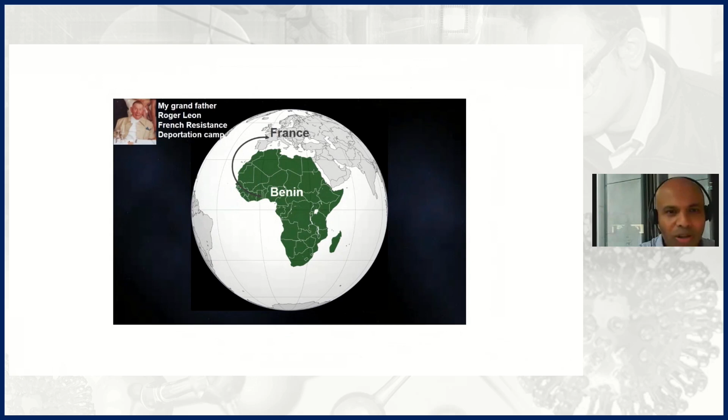What I would like to start with first is really talk about a bit of my background, because I always consider that history is important. This makes who we are today. So here we go. I'm born between different cultures. I'm born in Africa, between France and a small country called Benin. My grandfather was a French resistant. He went to deportation camps and survived those camps.

My other side of the family comes from a country that was at the time called Dahomey, which was a French colony. And if you remember, not that long ago, organizing colonial exhibitions and human zoos was pretty common. And so when we think about things that are normal today, they were not that normal a long time ago. And so this means that as a society, we can evolve and we can do great things.

Benin was very famous also because this was a port along the slavery coast. And so we know the history behind this. If you go back to the history of Africa, actually Dahomey was one of the most influential kingdoms in Africa. It was very well known in Europe in particular, with the Portuguese coming early in the 17th century, for its Amazons. The king used to have a special army only made of women that were known as the Amazons for the Europeans, or Mino for the Dahomean people.

And so if you go back to Dahomey, you can visit what is remaining of the palace of Abomey, which was burned upon the loss of the last king of Dahomey against the French. The reason I mention that is because the last king of Dahomey was called Kondo.

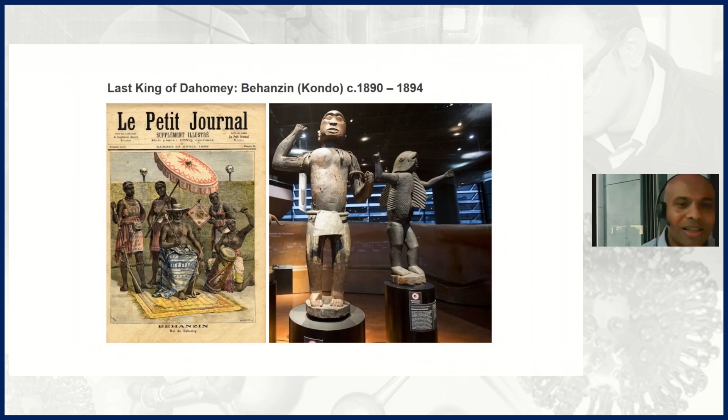My name sometimes is seen as complicated, and typically there are reasons for that. I'm born as a Zinsou, and so the tradition in Dahomey is that the first kids that are born as twins cannot carry the same name. So I've got two grandfathers, one who was first born with the name of Zinsou, and the second one couldn't carry the same name, so he was called Aguey. Aguey means twin. And so to recognize the background of our family, my mother decided that I had to carry a French name, Francois, and Kondo, which comes from the last king of Benin.

My grandfather was the first president of independent Dahomey for a year before a coup d'etat, and my father was among the African elite that were sent back to France to be educated. So my father actually studied political science. When he came back to his country, he wanted to develop a bank of investment for Africa and do things like microcredit to help his country develop. But some of his classmates, when they came back to their country, organized some coup d'etat. So when the French government saw that my father had an ambition to develop a bank of investment, he was put in jail. And so this was the end of this adventure.

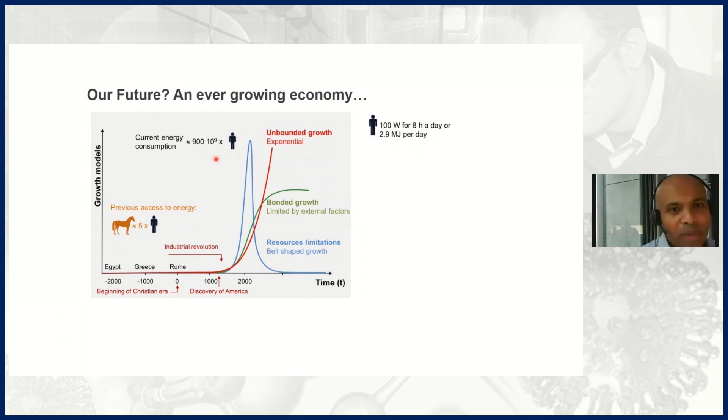Before the Industrial Revolution, what we had access to is mainly slaves, typically with an output of 100 watts, and animal power, and then renewable energy in the form of wood, for example. Then through the Industrial Revolution, we discovered how to use fossil fuel in the form of coal, then oil, that is more energy dense, and typically this has enabled us to significantly grow the Earth's population and grow the capability of our humanity.

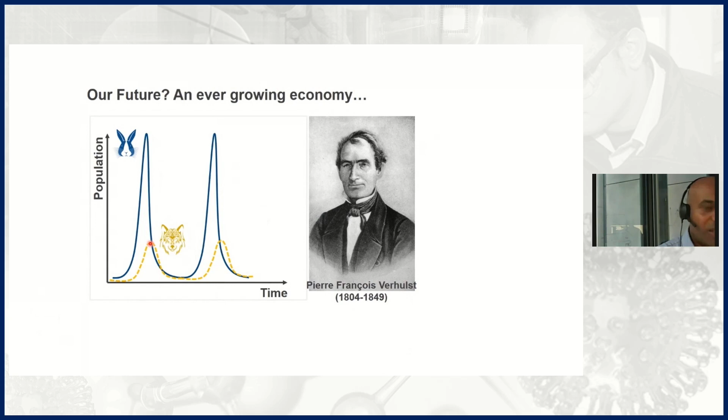Those bell-shaped behaviors have been known for a little while now, since the 19th century. In particular, these models were developed by a Belgian mathematician, Pierre-Francois Verhulst, and typically he was looking at animal populations. If you take some rabbits and wolves, typically the rabbit population will increase as long as they have access to food, and then the wolf population will follow the same trend, and then it will reach an optimum where all the rabbits are going to be eaten, and so the population is going to decrease.

We know the same thing is happening for all resources, and this was shown by King Hubbert, who managed, with a very similar model, to predict the oil peak in the US. So for me, the best we can achieve, unless we find unlimited resources somewhere in the galaxy or the universe, is potentially a bounded growth. And so then the question is, how do we live in a world where we have a bounded growth?

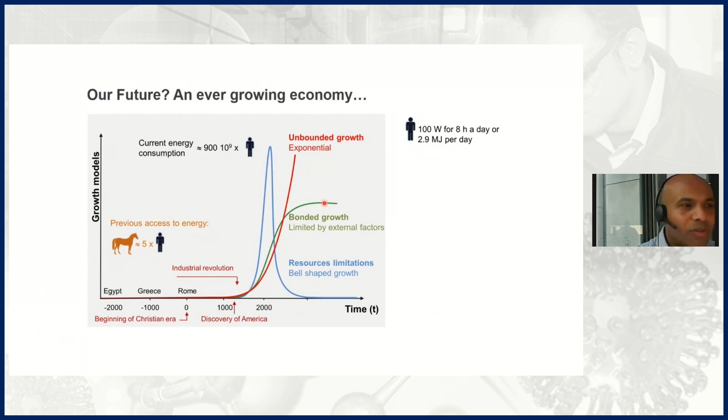Another way to look at this is to consider the Earth's entire population, and divide the amount of electricity consumption across our planet by the number of people we have. You can classify that in a chart like this. What you see is that the average across the world is about 1. So we have enough people on the planet to produce the energy we consume globally. If all of us were slaves, we would produce enough energy to sustain our current consumption. What you see is that this relies on many countries with minimum access to energy, and a few countries with extensive access to energy.

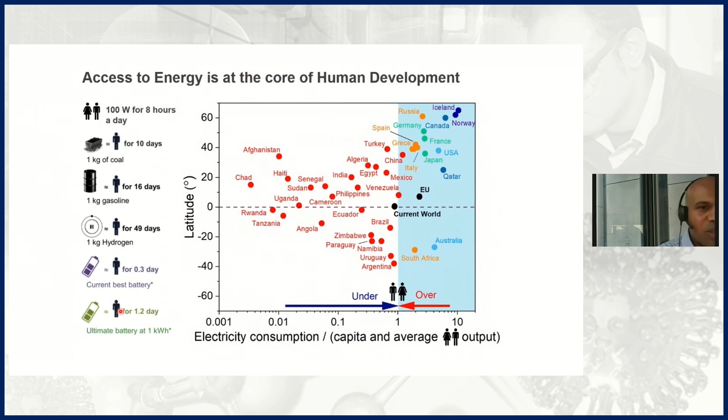I will comment on batteries later, but the energy density of batteries is rather low in comparison. For me, the key message I want to share today is that I believe hydrogen, if we can do it well, has the power to reshape our society and provide equal opportunity. This is why I've always been extremely interested in developing the science behind hydrogen, because we can probably do very good things with that beyond the simple act of making money and creating jobs.

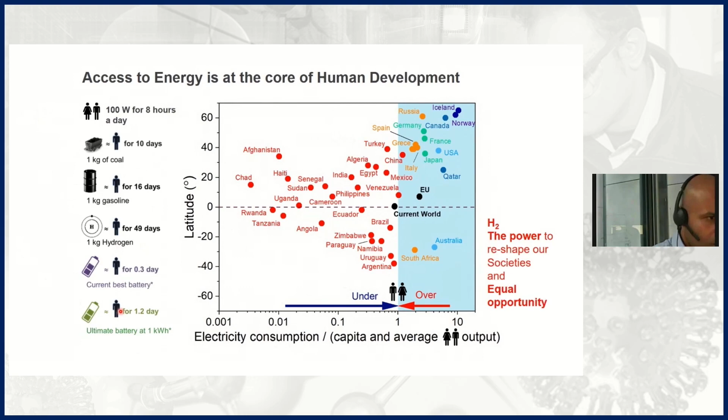Okay, so our solution is most likely back to the future with renewable energy. We know we have plenty of renewable energy around us. If you take, for example, the solar radiation per second, that's equivalent to a huge human output. We can run that through solar panels, and the technology exists, although we still need to improve it to increase efficiency, because the efficiency of solar panels is relatively low. We also need to develop technology where those solar panels will be easier to recycle, so we can fully close the loop and create a real circular economy.

Use it locally through a combustion engine, because you have to remember that in our society, to produce goods or have access to various things, we need not only to generate electricity, but also to generate heat, particularly for our homes but also for many industrial applications. This is something great with hydrogen: you can actually do both. This can help us sustain and improve our living standard.

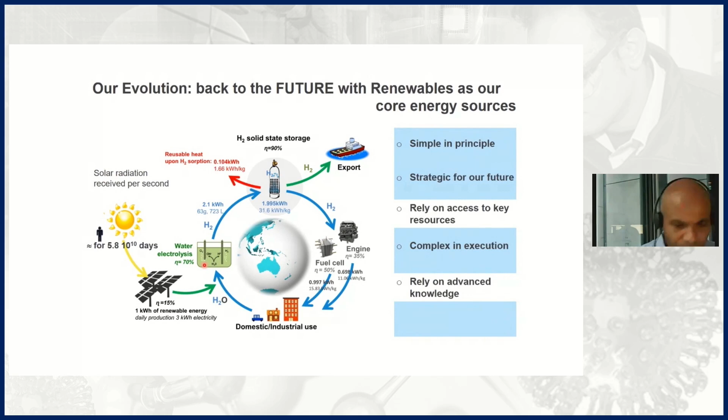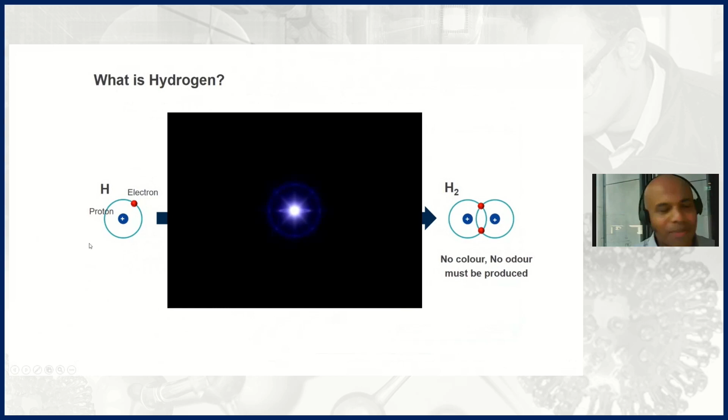Okay, so what is hydrogen? Maybe I thought I'd come back to the basics. Hydrogen, let me find my pointer. Hydrogen is a very simple element: one proton charged positively, one electron. Here you have a very simplified model of what the hydrogen atom looks like, with the proton in the middle and the electron spinning around.

In reality, it's a bit more complex. The electron doesn't spin around a specific orbital. You will find it in different positions depending on time. When you take those two hydrogen atoms together, you will form a hydrogen molecule. This hydrogen molecule has no color, no odor. It exists in the atmosphere at very low concentration, parts per billion.

There is some excitement these days about natural caverns that will contain some hydrogen, but this is yet to be determined. So really, if we want to have access to this hydrogen, we must produce it.

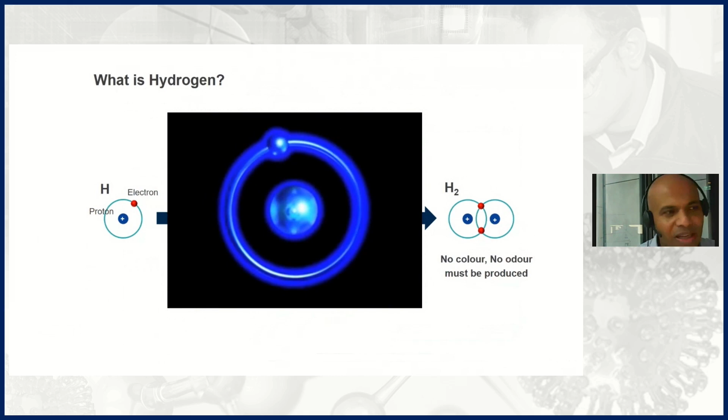To come back to hydrogen and history, hydrogen was first discovered in the 16th century, and there are some old manuscripts showing Paracelsus simply putting acid on some metal chips, typically iron, and observing the evolution of a gas. He was not able to tell what that gas was. Robert Boyle made the same observation, and Henry Cavendish finally isolated the gas and called it the inflammable air.

If you look in the literature, the name hydrogen comes from Antoine Lavoisier. Very quickly after hydrogen was discovered, it was already used by engineers, and the first one to use that was Jacques Charles, a Frenchman. He used it to fly some of the very first balloons. This one is called a charlière, not a montgolfière, because the montgolfière relies on hot air.

These rely on hydrogen. So the hydrogen was produced with what I would call today a dirty process. Typically, you take some iron chips and pour some acid on it, and this will evolve hydrogen, and then you inflate your balloon.

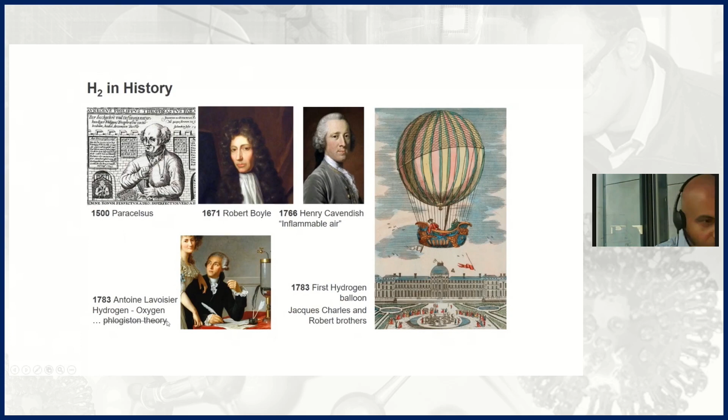As you know, there's rivalry between the French and the English. So maybe the English discovered the molecule, but the French brought some elegance to it. In particular, Lavoisier refined all the chemistry nomenclature in naming what we know today as hydrogen and oxygen. Very quickly, as I mentioned, hydrogen has been used in various applications.

What we see today is the evolution of a lot of work done in the background. The first person to use hydrogen for mobility was Antoine de Rivaz. He was also French, a general working in the army. He quickly realized that hydrogen was something very good—it explodes, and it does that in a clean way. So he designed the first spark ignition engine.

On his small device, what we'll call today an automobile, he had a rubber balloon in which he put some hydrogen, inflated the balloon, and this was sufficient to get this charrette to move for a few meters as you light the reaction. In 1863, Lenoir, who was working on developing a Hippomobile, actually produced hydrogen through electrolysis and had some storage vessel on board, and ran this Hippomobile in Paris, between the middle of Paris and Joinville-le-Pont, at a speed of 3 kilometers an hour.

Later on, you had the inflated balloon, like the Zeppelin, that started to take people across the Atlantic. The incident of the Hindenburg, as you know, is very famous and gave hydrogen its reputation as one of the most dangerous things we can deal with. Jules Verne, in 1874, already could see the limit of coal and was already calling for a water economy or a hydrogen economy.

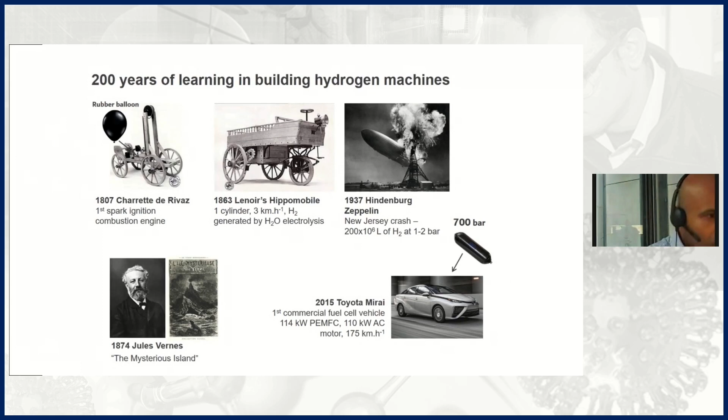Okay, so this calls a critical question: what are the different states of hydrogen, and can we have access to hydrogen in different forms? Here is a phase diagram, showing the different forms of hydrogen under different conditions of temperature and pressure. At room temperature and atmospheric pressure, hydrogen is a gas.

So typically we are here, and hydrogen is a gas. If you start cooling down the hydrogen to minus 250 degrees C, you will have hydrogen in a liquid form.

And if you want to solidify hydrogen, you will have to go to extremely low temperature and extremely low pressure. And if you want to have hydrogen in a metallic form, again, you will have to go to extremely high pressure. This has been demonstrated only a few years ago.

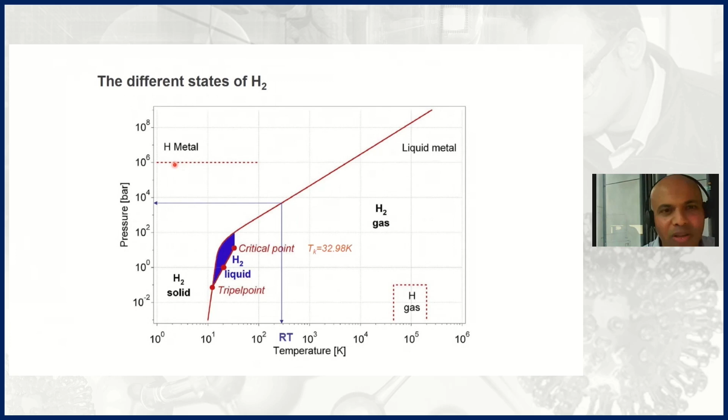You can compress hydrogen to densify it, so you can use it, for example, in vehicle applications. You may have seen that the norm today is 700 bar. There is a reason for that.

It's because as soon as you start compressing the hydrogen more, you need materials and vessel wall thickness that are heavier, and this means you are going through a curve like this. So at some point, the vessel is too heavy, the volumetric density of the vessel is too low. The optimum with the best material we know today is around 700 bar, so compressing hydrogen at a much higher pressure doesn't bring any benefit.

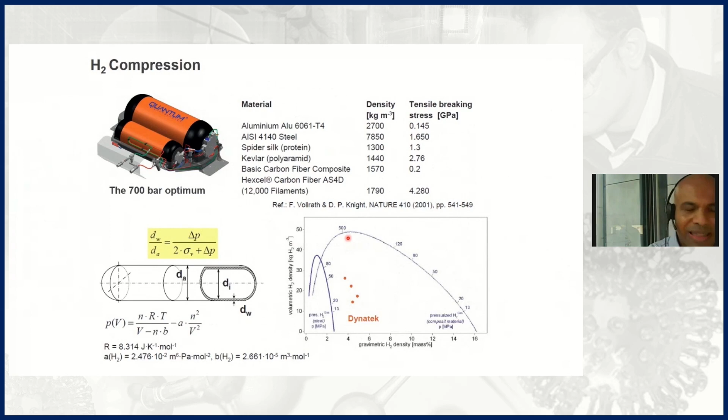You can also liquefy hydrogen. Typically what you will do is start from very pure hydrogen, otherwise you are going to liquefy impurities like oxygen and nitrogen too. Then you run that through a range of heat exchangers, cooling down the hydrogen, for example, with liquid nitrogen first, then run that through a catalytic exchanger to further liquefy the hydrogen.

The reason you need to run the hydrogen through a catalytic system: a catalytic system is typically a metal that enables you to convert two forms of hydrogen into one. Without going too much into scientific detail, hydrogen at atmospheric pressure and room temperature exists in two forms, what we call ortho and para. These correspond to the spin - typically the nucleus or proton has a spin, which comes from its magnetic moment of rotating. As you liquefy hydrogen, you are going to convert all the ortho into para.

This is an exothermic reaction, meaning it's releasing a lot of energy. To facilitate that process, you use something called a catalyst. So what you see typically is that the liquefaction process is very energy intensive, and typically a third of the energy in the hydrogen you put in is used just to liquefy hydrogen.

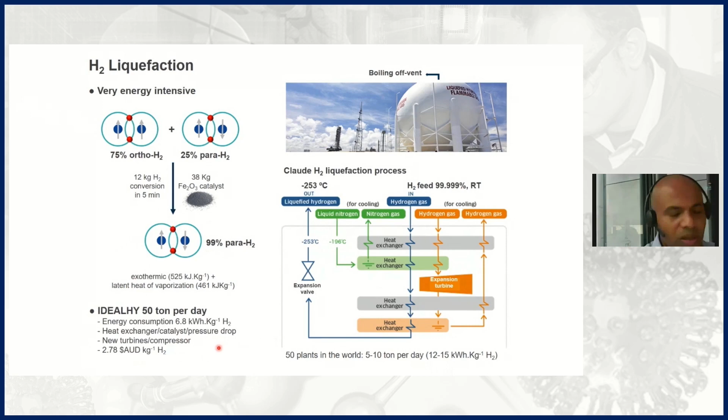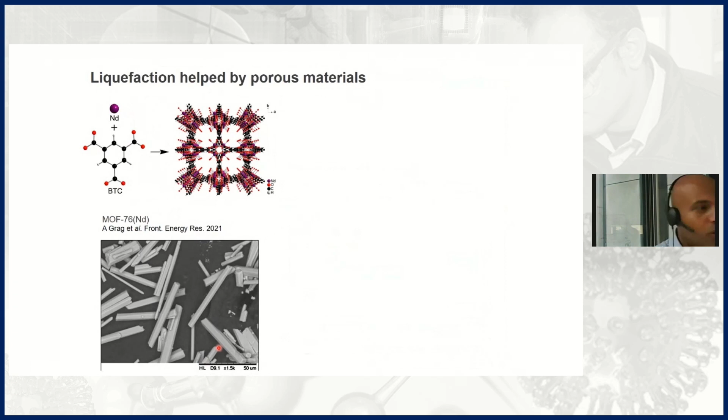One thing you can do to improve the liquefaction is to use porous material, for example metal organic frameworks, or MOFs. There is a lot of expertise in the country in making those MOFs. What you rely on is material with extremely high surface area, and roughly there is a rule called the Chahine rule that you can store 1% of hydrogen per 500 square meters per gram of material surface area.

What this enables you to do is to liquefy hydrogen at a temperature of minus 150 degrees C instead of minus 250 degrees C. But the downside is now you have to use this material, and you have to find effective ways of producing those materials at cost.

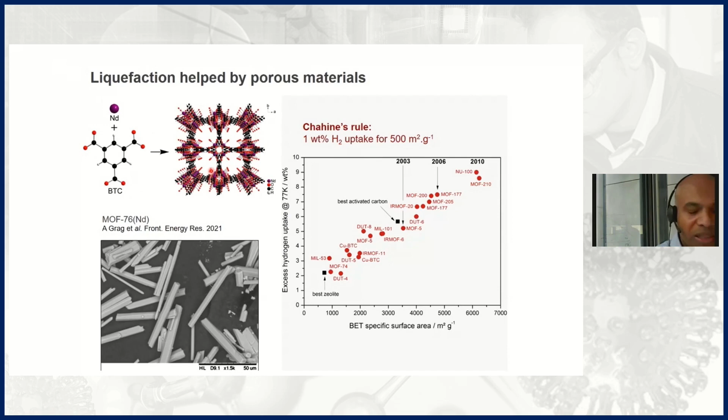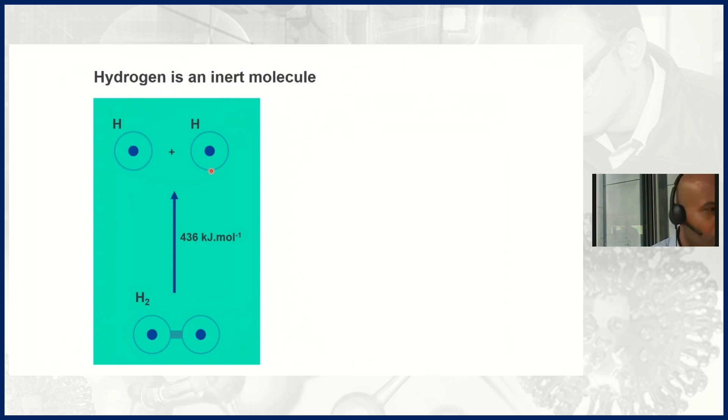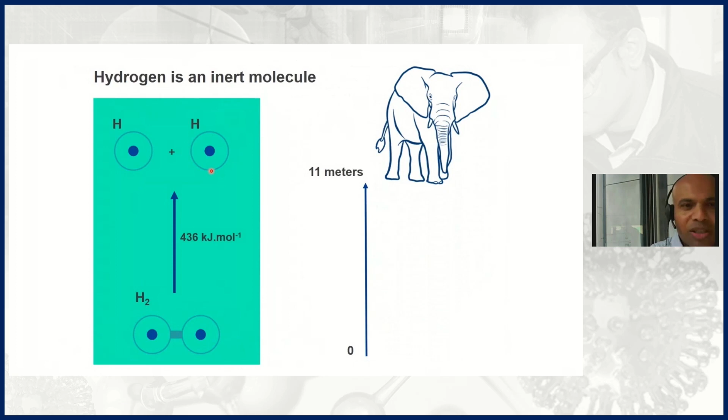So, very quickly, hydrogen is an inert molecule. So if I take hydrogen as a molecule and I try to break it like this, I need a lot of energy. I need around 400 kilojoules per mole. This is equivalent to taking an elephant and lifting that elephant by a height of 11 meters. So you can see that if you just have pure hydrogen, nothing much will happen.

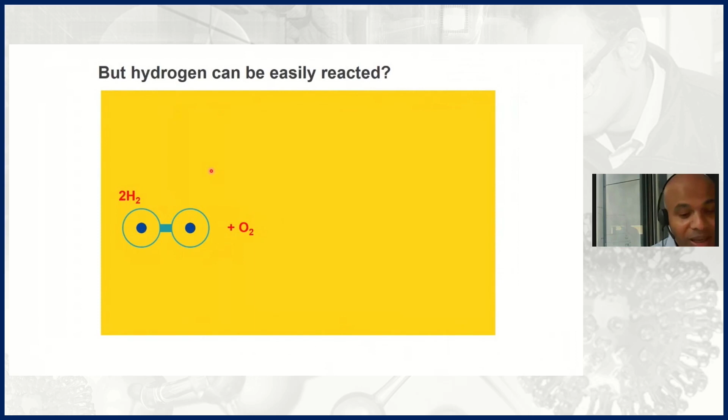But as we showed with the Hindenburg, hydrogen can burn pretty well and create some explosion. And so it's very easy to react. For example, if you put it with an oxidizing molecule, oxygen. What will happen is that this hydrogen plus oxygen needs to overcome an energy barrier. So if you just take hydrogen and oxygen and put them together, nothing will happen.

But as soon as you provide enough heat and temperature in the range of 500 degrees, those two molecules will be able to go over this activation barrier for the reaction to happen, and the hydrogen and oxygen are going to react and create water. With that reaction, you will have some energy release, and if this energy release is effectively dissipated within the remaining hydrogen molecules, this will provide additional heat to create a cascade reaction, and so you can have an explosion.

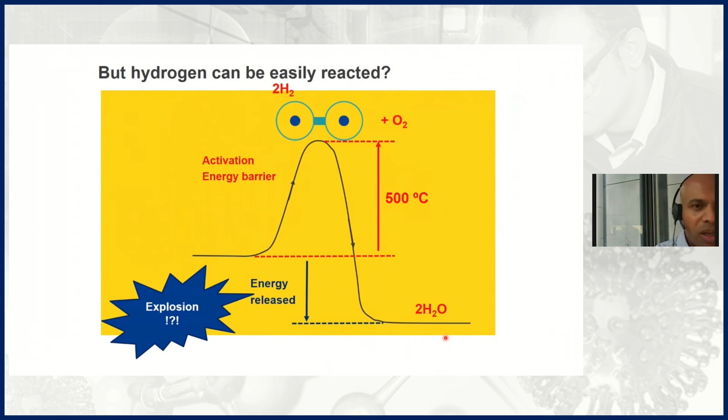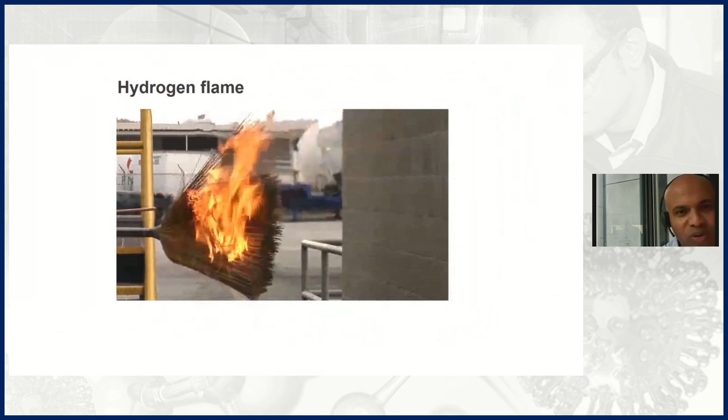One thing you have to keep in mind also is that hydrogen has an invisible flame when it burns. So here you have an example of this hydrogen flame, and typically to see it, you need to put, for example, a broom in front, and then you will see the hydrogen burning. So a hydrogen flame can be quite dangerous. So one of the things we have been working on is how we enable safe combustion of hydrogen as a fuel with oxygen.

And typically what we are looking at, the kind of things we have been developing is, can we catalyze the reaction? Which means, can we decrease this energy barrier that the hydrogen and oxygen have to overcome to start reacting. And by doing so, can we create the conditions so we cannot have cascade reaction and explosion?

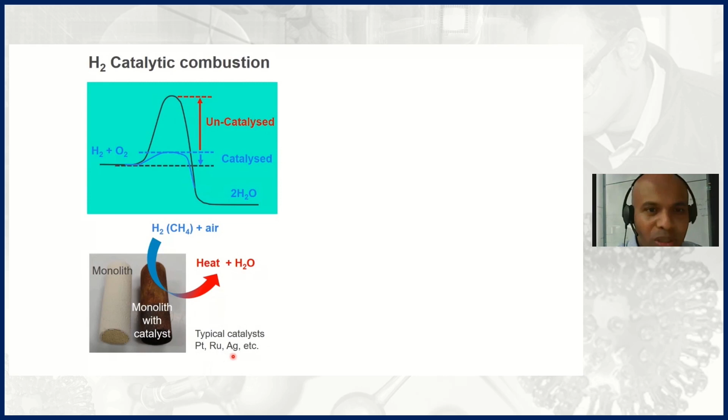So this is an example of the catalyst we are developing. Typical catalysts in the literature that combust hydrogen, and can also combust methane, are based on noble metals. So we are doing a lot of work to understand how we can develop catalysts that are not based on noble metals like platinum. And so in 2017, we converted some of those catalysts into the shape of barbecues. And so we can claim that we have the world record of cooking pancakes. We cooked about 12,000 of them on open day on those barbecues.

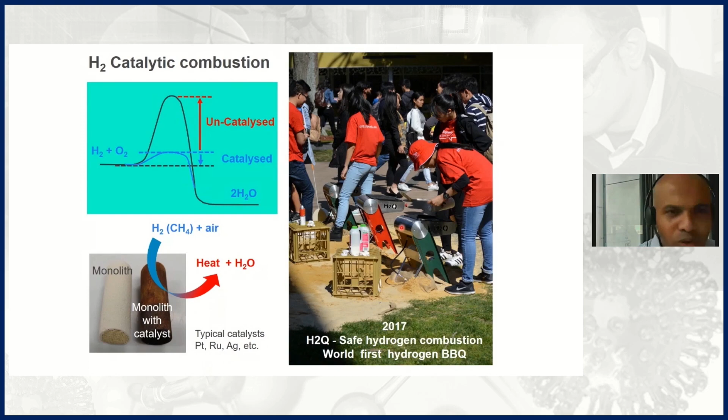So let me go a little bit to the science and what has to be tackled. So as I told you, hydrogen exists in an atomic form with a proton and an electron. If you remove that electron, you only have the proton. If you add another electron, you have something that is called a hydride. And then if you bind this hydrogen atom to carbon, you have some hydrocarbons that we use in fossil fuels, but also this is part of our food chain.

You can also have ammonia, and the interest of using ammonia as an energy carrier for hydrogen. You have hydrogen in the form of water, and the idea also to split water to produce hydrogen, and then you will have hydrogen binding to various elements of the periodic table, for example, to chloride to form an acid, or aluminium to form a metal hydride.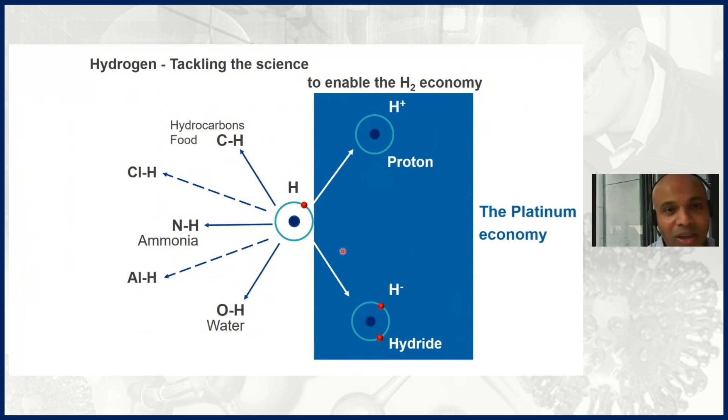One thing that needs to be mentioned is that when you look at this hydrogen economy, a lot of those reactions rely on noble metals, mainly platinum. And so there is a key need to understand how we move away from platinum, which is extremely scarce. Otherwise, we will rely on a platinum economy where we don't have so many platinum resources on the planet, although we can recycle it. So let me take you through some of my thinking around controlling the H+ and the proton. This is a key reaction in fuel cells and electrolyzers.

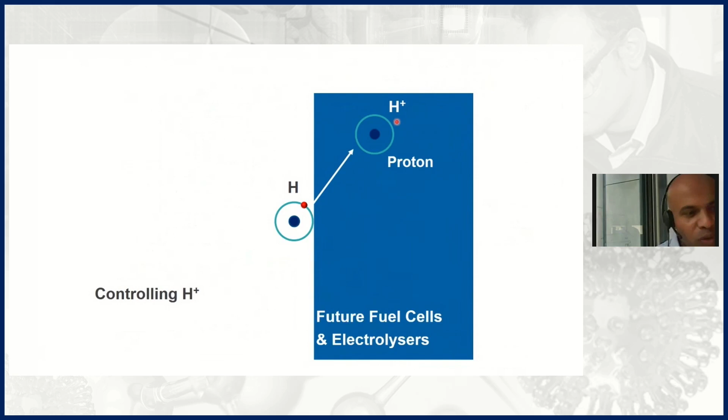A typical fuel cell is something like this. Typically, you have what we call a bipolar plate that will be there for the gas to diffuse, hydrogen on one side, oxygen, air on the other side. Then you have a gas diffusion layer that will enable a good diffusion of the gases. Then you will have a membrane in the middle that will be there to conduct the protons.

As hydrogen comes in, it gets split into its elements, proton and electron. The electron takes an external circuit. Then you can use those electrons to create work in the form of electrical work. And then they go back on the other side to recombine with the proton and oxygen to release water.

Inside the systems, the reactions are quite complex because you have a bundle of activated carbon or various forms of carbon. You have water also that is needed for those protons to migrate. You have catalysts to facilitate the hydrogen splitting, the recombination with the oxygen.

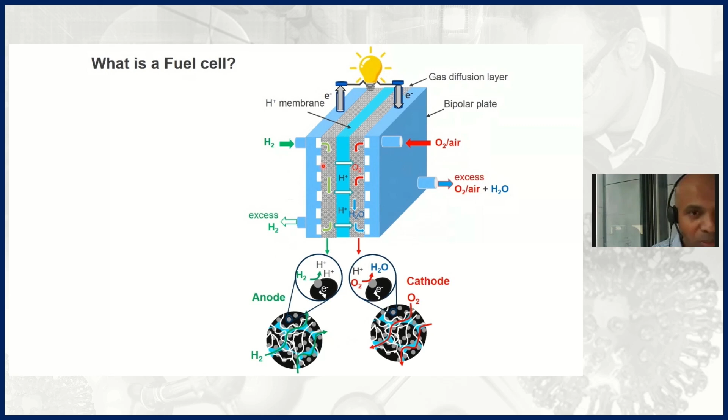And so when you look at a fuel cell and how a fuel cell is behaving in reality, you have the theoretical potential, and then you have activation loss, which means that you will have some loss in the amount of energy you can extract. And this is mainly due to the reaction of the electron with the catalyst to convert the proton and oxygen into water or split the hydrogen into protons.

You will have ohmic loss, which is mainly due to the internal resistance of the entire device. And so the question is, how do you minimize all those things so you can actually have a cell potential closer to the theoretical value of 1.2 volts?

A typical fuel cell in practice looks like this. You have a Nafion membrane, you have a gas diffusion layer, which is a thin piece of porous carbon, and then you assemble that across a bipolar plate. Those ones are made of graphite, and you have one cell, a second one, and a third one, and the entire system forms a stack. So you can end up developing a certain power output.

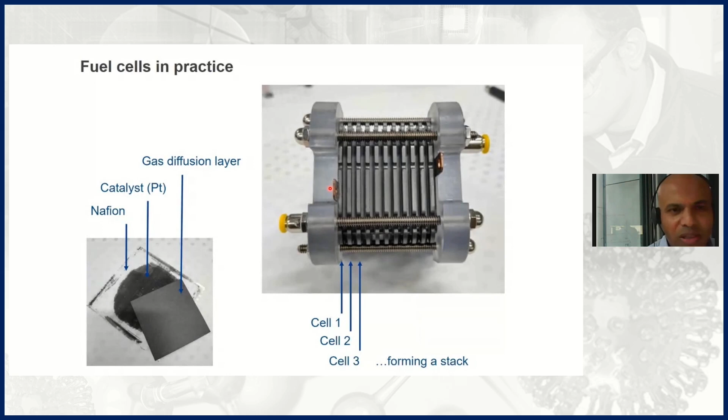One of the key things about this is, as you can see here, and this is mainly what is happening in industry, although some robotization is occurring now, is that to assemble a stack like this, all this is done by hand. So you need some people that come around and will align everything perfectly.

What we are trying to do in my lab is rethink all that. How we remove critical minerals, in particular noble metals, how we increase efficiency, how we extend operability, how we remanufacture fuel cells. So how we assemble all those different elements and we can simply manufacture fuel cells through a very simple technique and method.

One of the ideas we have been working on beyond developing very advanced catalysts, so for example, here, a catalyst based on tin instead of platinum. We have been working on developing a concept around 3D printing fuel cells. So how we can 3D print the entire fuel cell so this can be manufactured in a very effective way and can become a very cost-effective way of making low-power fuel cells for various applications.

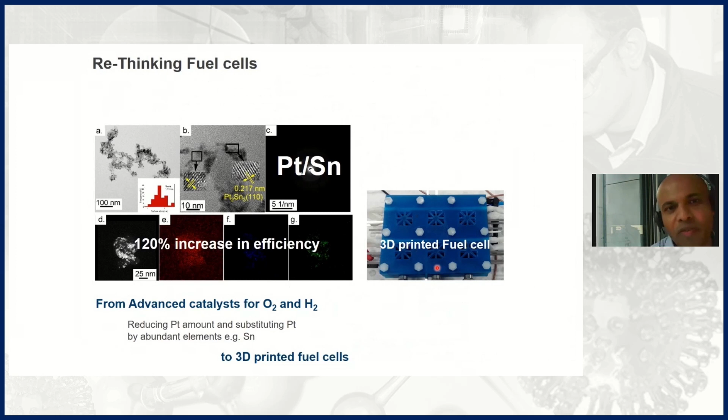We have also been trying to understand how we get those fuel cells to work under extreme environments. As I just mentioned to you, a fuel cell will produce some water. This means that in areas where, if you live in Australia, it doesn't really matter. The weather is not often so cold, but if you live in Iceland, it will be sub-zero many days of the year, and so the water inside the fuel cell will be frozen. So how do you develop fuel cells that do not rely so much on water to function?

And how do you develop fuel cells that can work with low oxygen content? Because typically what will happen is that if your oxygen content is low and you don't feed the fuel cell with enough air, the catalyst is going to suffer and is going to degrade very quickly.

And so we have been working, for example, with Elson Space Engineering to develop fuel cells that can be used to run at high altitude, 40 kilometers above the ground, where oxygen concentration is not high, where it's pretty cold, minus 40 degrees C, how we get fuel cells to power pseudo-satellites to do observation, for example, to monitor bushfires.

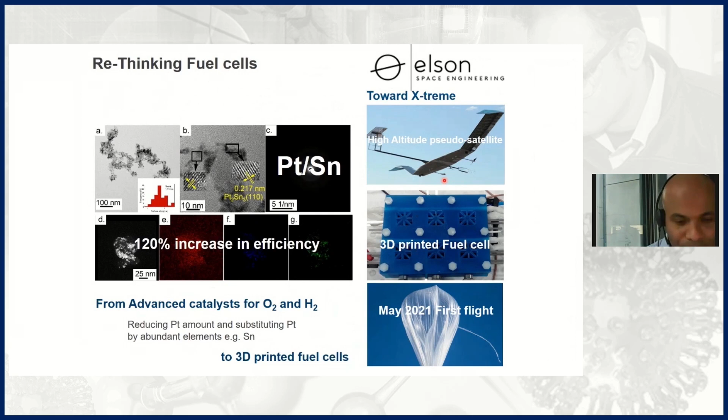We have been also rethinking fuel cell architecture, and the reason for that is we want to work toward enabling the use of fuel cells across major consumable goods. So for example, one of the concepts we are working on is the cylindrical fuel cell. You will see that across the market and the literature, most of the fuel cells are square because they are easy to manufacture. There are reasons for making cylindrical fuel cells.

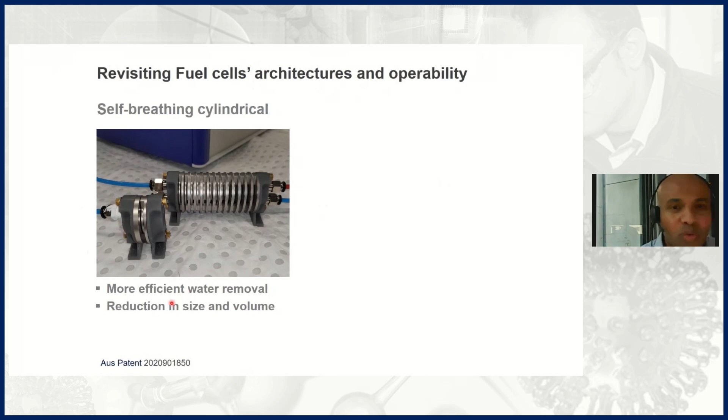We can more efficiently remove the water. We can reduce the footprint of those fuel cells, but more importantly, we can start making fuel cells that look like batteries. So things we are used to. And so one of the concepts we have been working on also is incorporating within those fuel cells a hydrogen storage material.

One of the things you may have come across is when you take a fuel cell, you need to inject oxygen or air on one side, hydrogen on the other side, and then it will take a certain time for the fuel cell to start. So typically you need to back up the fuel cell with a battery. And the question is how you remove the battery and how you get the fuel cell to start very quickly, in a few milliseconds, which is what is needed for most power applications.

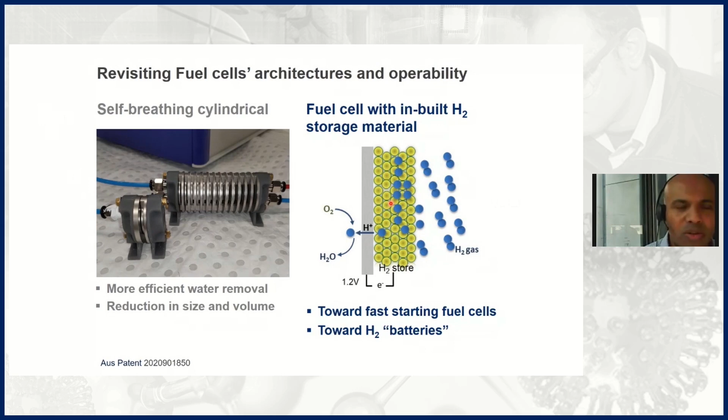And so the concept we have been working on is integrating within that fuel cell a hydrogen storage material. So you actually have hydrogen on board the fuel cell that is stored safely. So this means that you cannot have any thermal runaway or safety runaway. And so when the fuel cell needs to start, the hydrogen is ready to be delivered. You then inject hydrogen gas. The hydrogen gas will diffuse through the hydrogen storage material and get the fuel cell to continue to work.

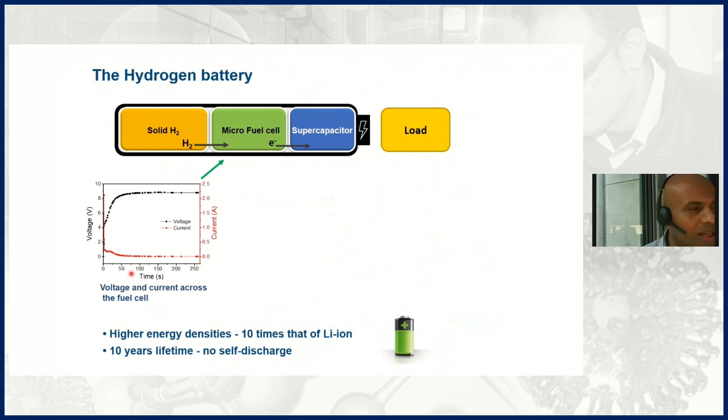A concept of battery like this that we have been developing, and what we call the hydrogen battery, incorporates a solid state material, one of our micro fuel cells, a supercapacitor and a load. And typically, when you look at this, you will have your fuel cell that will produce a current and voltage that are constant across the system. Then you will have the supercapacitor that will deliver a certain peak of power when it's needed. And in that particular example, we use that to run an Internet of Things device that needs to send a message once a day or so to say the temperature in the room is fine or the purity of the water in the system is fine.

And the advantage of those systems is then we don't rely on classical electrochemistry anymore, like in batteries. So we rely on micro fuel cell systems that are stable, solid-state hydrogen storage materials that are stable. So this means that not only can you increase the energy density compared to a conventional lithium-ion battery, but you can have a very long lifetime for those hydrogen batteries in the field to do what they are supposed to do.

Very quickly, we are doing, in particular with my colleague in Japan, similar work around water electrolysis. When you start looking at water electrolysis, you have the alkaline systems that rely on the OH reaction. But you have also PEM electrolyzers, and those are very interesting because not only are they more compact, but they can start faster and they can enable distributed hydrogen generation simply because their footprint is lower. But the downside, again, of such electrolyzers is that they rely on expensive elements, iridium, platinum, and the question is how we remove those from those systems.

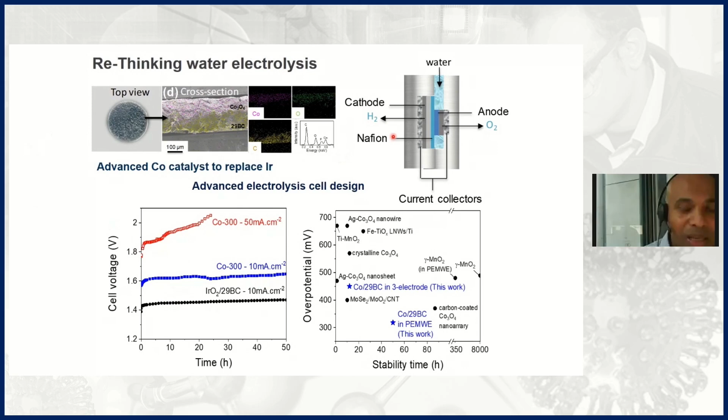And so we have been working with my colleagues in Japan, not only to replace those expensive elements, so here is an example with a cobalt catalyst that we have developed, but also rethinking the architecture of those electrolyzers, so we don't have problems of bubbles when the hydrogen is generated, and the system can be more efficient. I will stop on this.

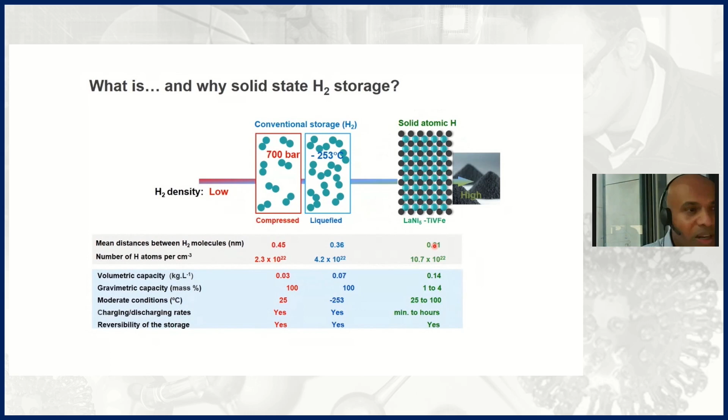What I want to do now is move to the protons, and those protons are highly important, especially in developing hydrogen storage materials. So what is a storage material? Typically, a storage material will store hydrogen in an atomic form. And so this means that you don't store hydrogen as an H2 molecule anymore, but you store hydrogen as atomic H, which means that you can bring the hydrogen much closer to each other. And this also means that you can store hydrogen in a much more compact fashion than what is possible with compressed hydrogen or liquid hydrogen. If you start to look at the energy density, typically hydrides will be competitive with fossil fuels because they can store more energy than what you can do with conventional batteries.

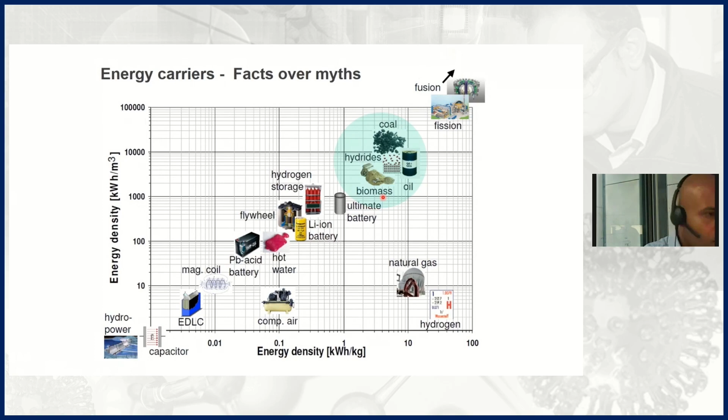So there are different types of hydrogen storage materials. There are storage materials that are known today to store hydrogen at ambient temperature, and there is a range of materials we are developing in particular in my lab that store hydrogen at much higher temperature, above 300 degrees C, but they have a storage capacity that is much higher than what is possible to do with the metallic alloys here in the form of iron titanium, titanium BCC, or high entropy alloys.

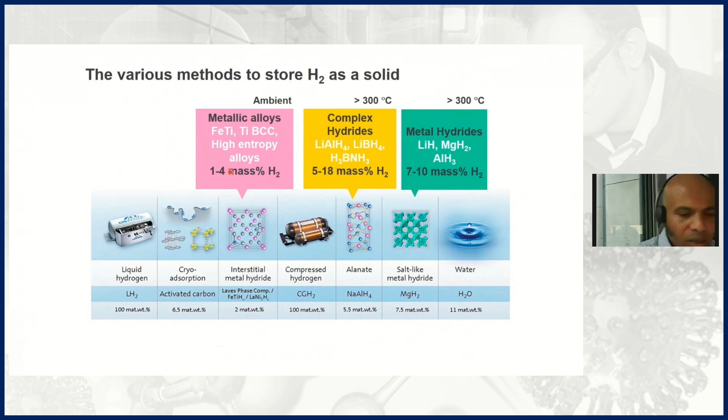The way those materials work is quite simple. They follow what we call equilibrium plateau pressure curves. As soon as you put hydrogen above the material at a pressure above that plateau pressure, hydrogen will diffuse within the material. When the material is fully loaded, the pressure will increase, and this means your material is charged.

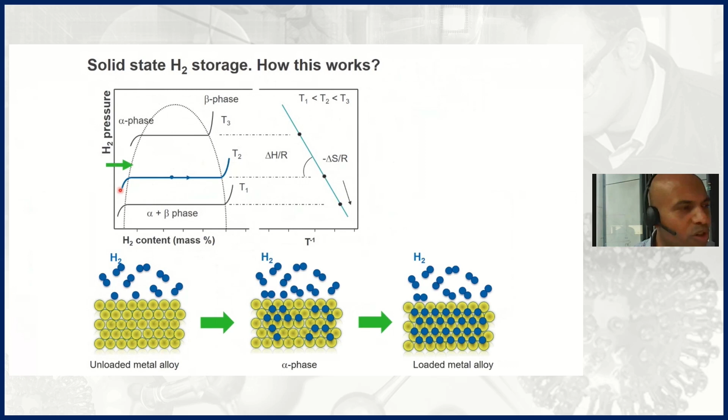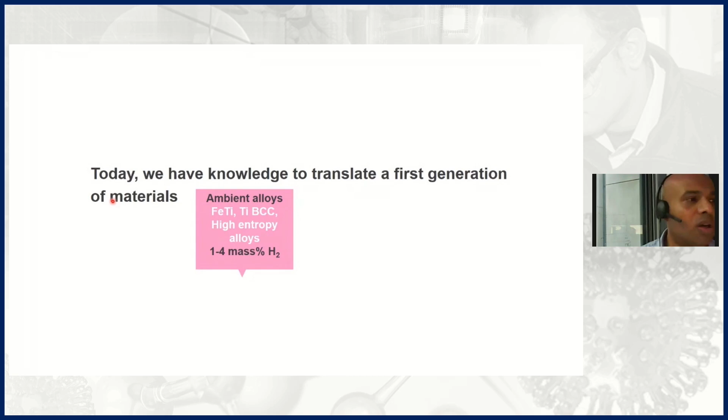For the material to discharge hydrogen, you simply need to apply a pressure below this equilibrium plateau pressure, and the material will release this hydrogen. Typically, the way the material is designed will dictate the operating conditions, in terms of pressure and temperature, under which the hydrogen is going to be delivered. Today, we know how to develop those materials with a storage capacity within 1 to 4 mass percent, and we know how to translate those materials to the market.

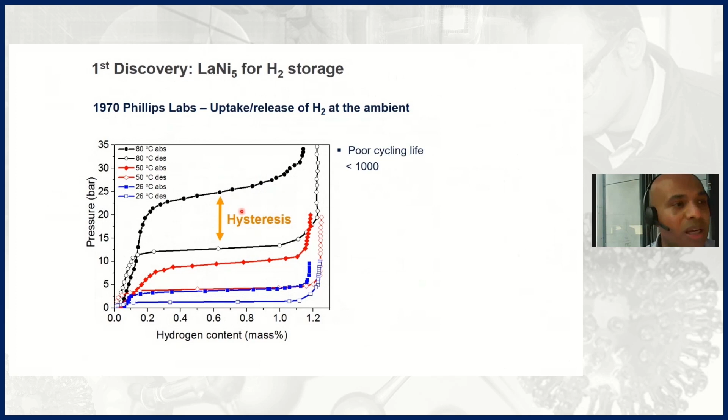These rely on discoveries made in the 1970s, one from Philips Labs, where lanthanum nickel 5 was one of the first materials developed to store hydrogen at ambient conditions. It was realized that lanthanum nickel 5 can simply uptake and release hydrogen, but this material has poor life cycling. Upon modification, it was developed and first used in nickel metal hydride batteries, in which you store hydrogen, or a proton, in the metal alloy.

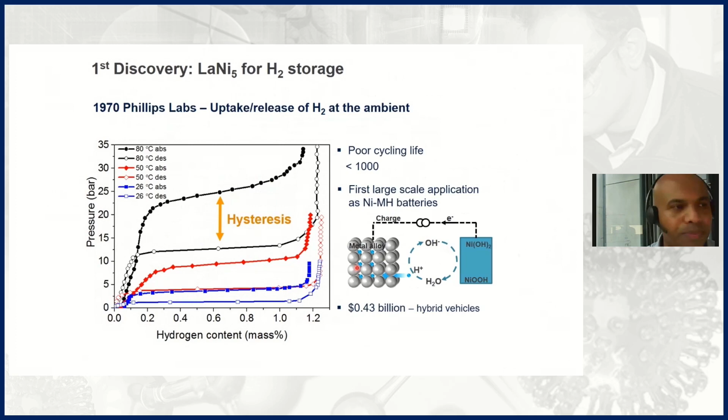This also relies on the discovery of a second alloy based on iron titanium, done in 1974 at Brookhaven National Laboratory. This material has what we call two plateau pressures, so it can absorb hydrogen at a certain plateau, and absorb hydrogen at a much higher plateau. This is not ideal because it means hydrogen is delivered and taken up at different pressures.

When you look at those materials and how you can control them, and you look at the microcrystalline structure, you can see that depending on it you form different phases, for example titanium or iron titanium, and those phases dictate how much hydrogen they store. So you need key knowledge on controlling the microstructure of the material so you can store sufficient hydrogen.

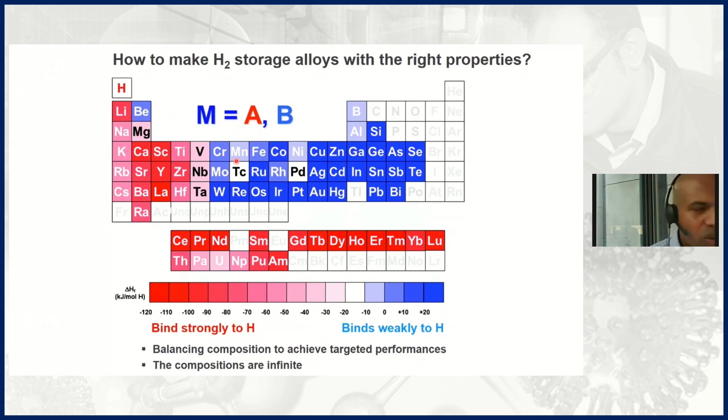To develop those materials, you have the periodic table as a playground, and typically you combine elements that bind hydrogen strongly with elements that bind hydrogen weakly to reach the right middle ground, so you can uptake and release hydrogen at room temperature, meaning hydrogen doesn't bind too strongly or too weakly. The compositions are infinite, and to design those materials you need access to key expertise.

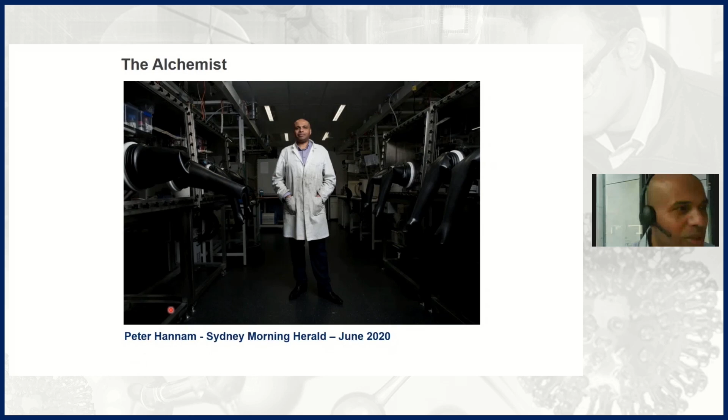When Peter Hannam came to my lab last year, he gave me the funny name of the alchemist. At the beginning I thought this was a bit silly, but preparing this presentation, this is exactly what it's about, to be honest. You need to know what you are doing to design those materials. One material with specific properties can only fit one type of application in terms of hydrogen pressure and release.

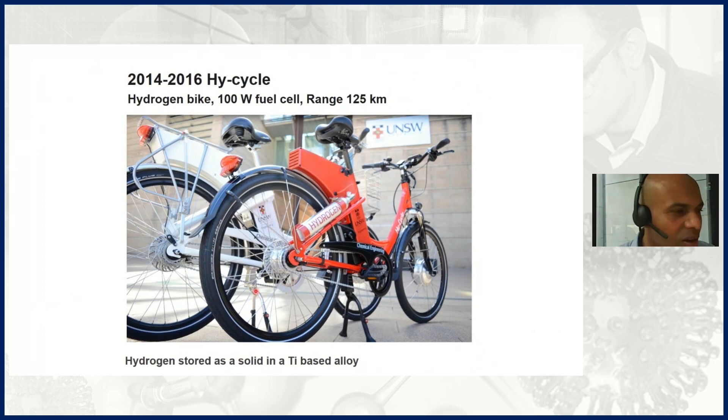We implemented those materials a long time ago by designing hydrogen powered bicycles. On the side here, you have a hydrogen canister containing a solid state titanium alloy, and this gives the bike a range of 125 kilometers.

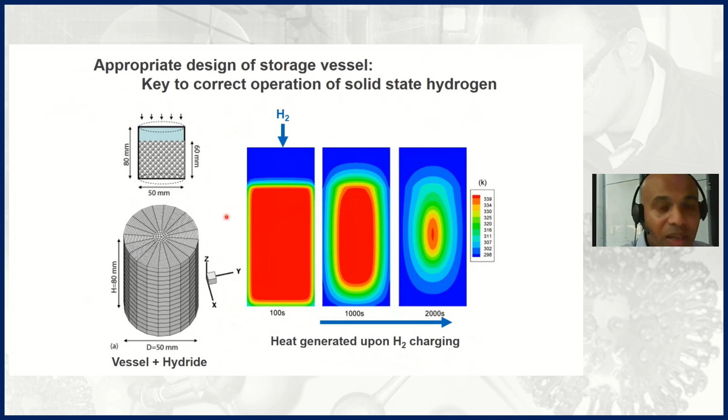One of the key aspects when you use those materials is designing your storage vessel properly, because uptaking hydrogen generates heat, and that heat slows down the rate of hydrogen uptake. This means you cannot charge or discharge as fast as you want. So you need to incorporate those materials within your storage vessel very effectively, and behind this you need a fair bit of engineering in your design.

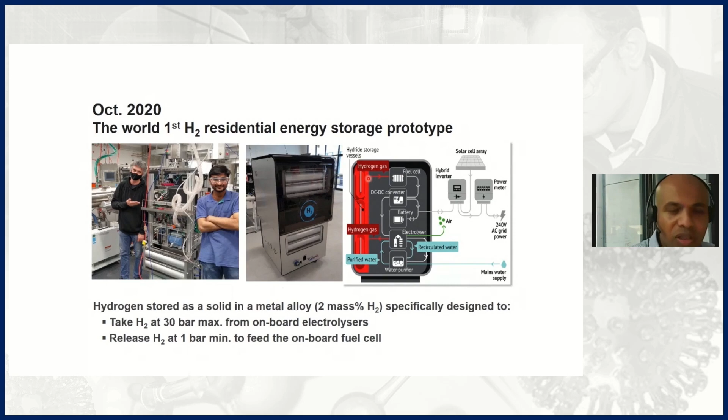In October 2020, we developed what we call the world's first prototype residential hydrogen system, fully integrating a fuel cell, an electrolyzer, and a hydrogen storage alloy with a storage capacity of 2%. It was designed to take hydrogen at 30 bar from the onboard electrolyzer and release hydrogen at 1 bar for the onboard fuel cell. This unit stores the equivalent of 40 kilowatt hours of energy in the form of solid state hydrogen.

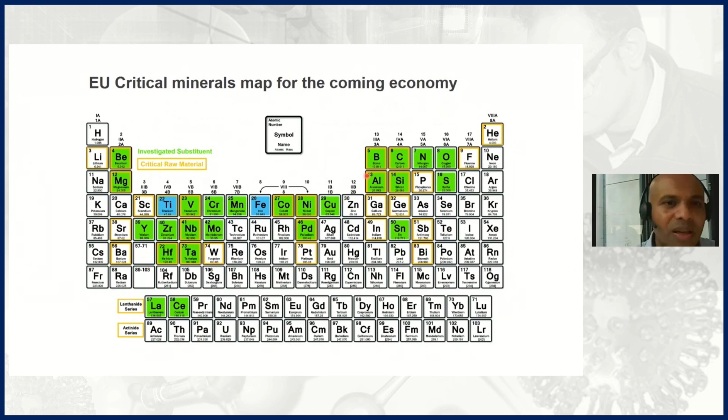What I want to go through is that critical map that has been put recently by the European Union, and you can see that if you talk about the renewable energy economy, there are a range of critical minerals that will be needed to sustain that economy.

In the interest of time, because I'm running late, one of the key aspects we are working on also is controlling the H-, so the hydride. Beyond the type of material I showed you that are ambient alloys, there are a range of very advanced hydrogen storage materials with much higher storage capacity that rely on controlling this H- state. And not only this H- state, but this H- mixed with different states of hydrogen.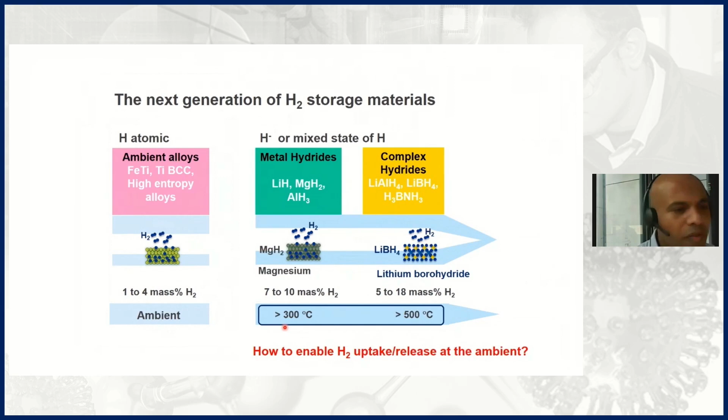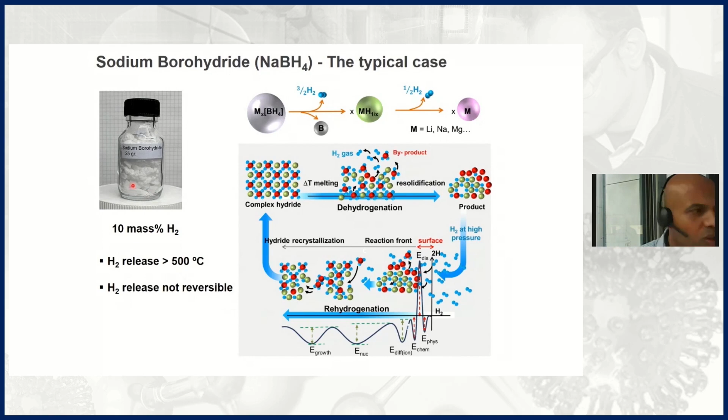The problem with those materials with higher storage capacity is the temperature at which they release hydrogen. Usually they need 300 degrees C or 500 degrees C to do so. In my lab, we work, for example, with sodium borohydride, which is a typical example. This is releasing hydrogen at 500 degrees C. The hydrogen is not reversible, which means that you cannot get the hydrogen back to reform sodium borohydride. So the key question is, how do we control that reaction so we can effectively store 10% of hydrogen in this material at the ambient?

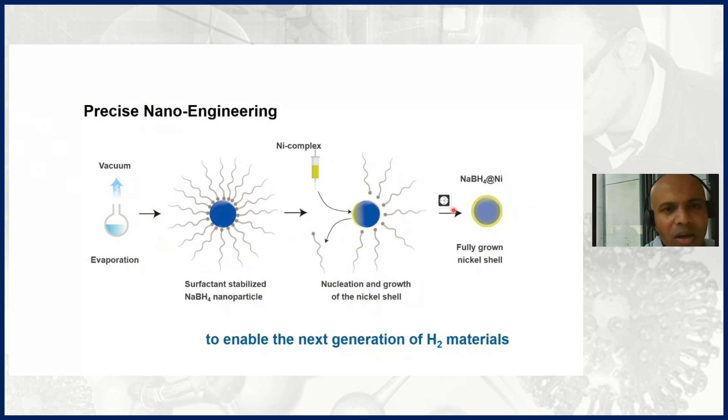One of the key approaches we have been working on is developing some precise nanoengineering so we can actually control the structure of those materials at the nanoscale, because we think that if we do so, we will be able to control how strongly the hydrogen binds to the structure. And so we will be able to uptake and release hydrogen at the ambient. And here is an example where we simply evaporate that, stabilize this with a surfactant, and then fully encapsulate that within a nickel shell so we can control the uptake and release from those materials.

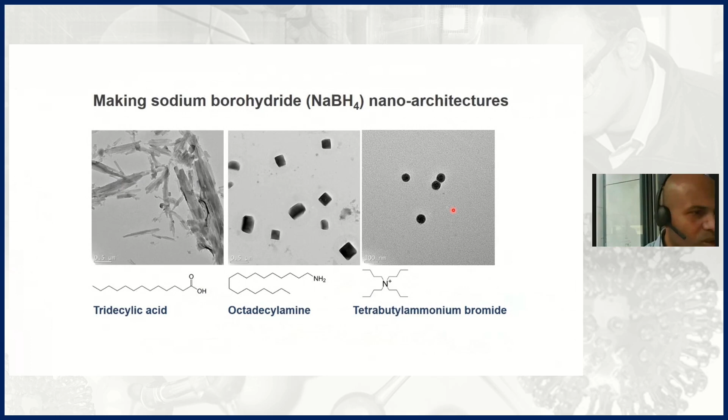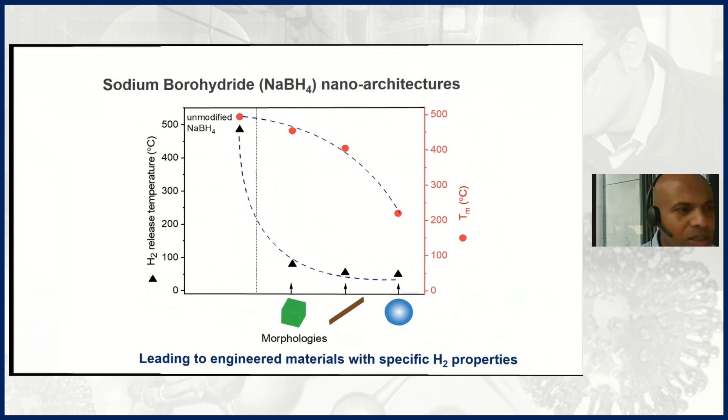We can make various nano architectures, and a lot of work has been done beyond that by my group to understand how we do that. But the key thing is that by controlling the nano architecture, we can dictate at which temperature the hydrogen will come out from that structure. And so if you take an unmodified sodium borohydride and you start to put that in the shape of nanocubes, nanorods, or nanospheres, then you can see that you can shift the temperature at which you can release the hydrogen from this nanostructure. And so a typical example where you can see that is if, for example, we put that

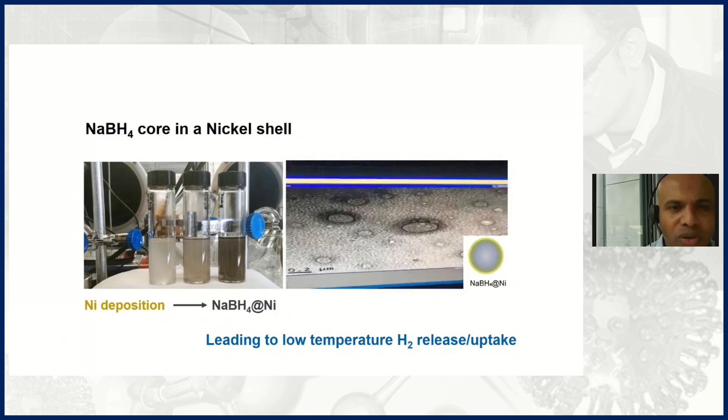under a microscope, and here is a core shell structure we have built, simply upon the excitation of the electron beam, you can see that this nanostructure is swelling, and this is because this nanostructure is releasing hydrogen at ambient temperature. And so this is an approach we are working on to understand how we can facilitate the uptake and release of hydrogen with those much higher energy storage capacity materials.

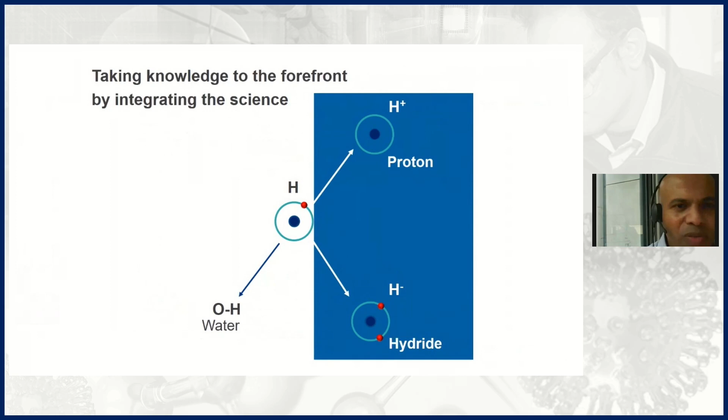To finish my talk, there are key things, very advanced frontier knowledge that we are developing in my lab, I would like to touch upon. And typically these rely on integrating some of the key scientific ideas in the community. So as I told you, typically when you take a hydrogen storage material, the conventional approach is to apply heat, so you can raise the plateau pressure and release hydrogen. When you do that, there are some disadvantages, because then you need to have access to a heat exchanger or something like this. And so what we have been working on is, can we rethink that process?

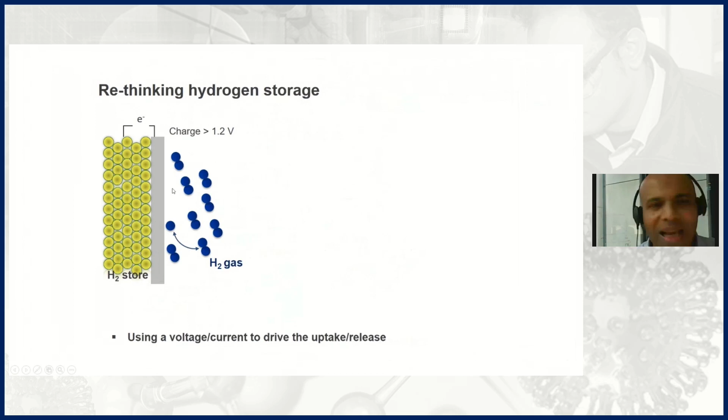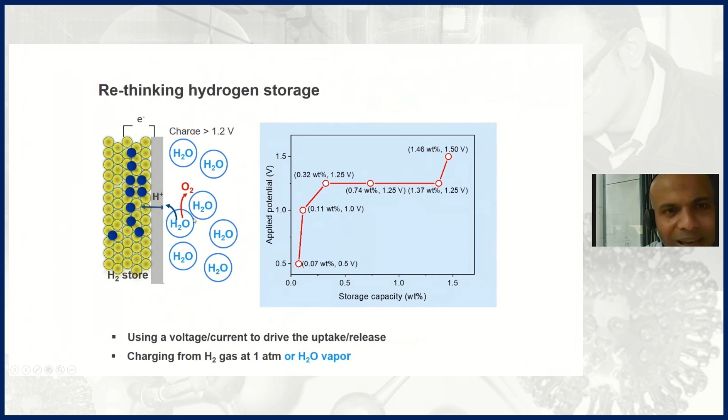So if I take a storage material, put hydrogen pressure on it, put a membrane here that can conduct the proton, and then apply a voltage, I can simply charge my material. And so what we have shown is by simply applying a voltage across our storage material and using a proton conductor membrane here, we can simply charge and discharge the material. And even better, we don't need hydrogen gas anymore. We can simply take water in the form of vapor and charge the material from water vapor.

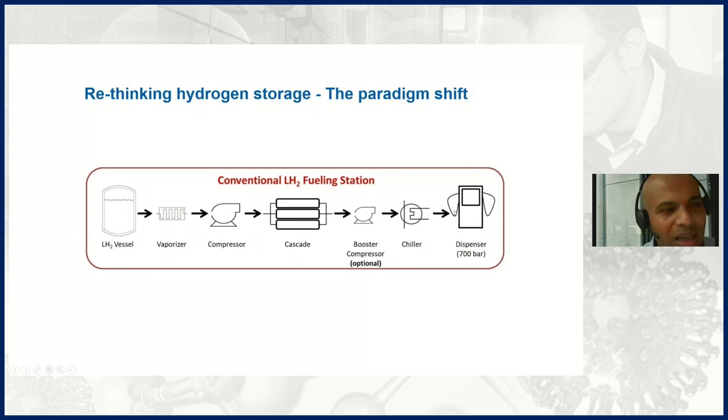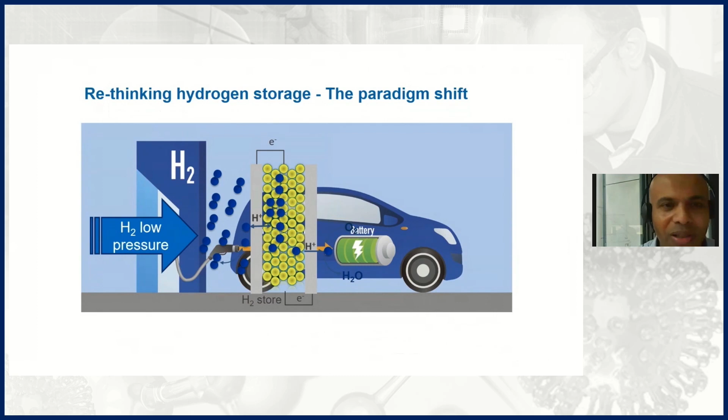The implication of that is, for example, if you think about a refueling station where you have those complicated systems where you need a storage vessel, a vaporizer if it's liquid, a compressor, a cascade, another compressor to boost, and then to be able to dispense the hydrogen, you can simplify all this. You bring hydrogen at low pressure, you bring our new concept in, where you simply apply a current or a voltage. You can then charge your car, and in your car, you can simply apply a current and voltage to discharge your hydrogen and get the car up and running.

Something else we have been thinking of is how we directly use light to charge our material. Here is an example where we decorated magnesium nanoparticles with gold, using the plasmonic effect of gold. By shining visible light onto our magnesium-gold material,

we can simply uptake and release hydrogen. Even better, we have shown that if we take something that can help split water using photocatalysis, we can directly split water, generate hydrogen in situ on the material, and store it in our storage material. For example, we've demonstrated this with titania nanotubes, a very good photocatalyst for splitting water, and palladium nanoparticles to store the hydrogen.

If you remember the core-shell approach we are working on, in the future we could replace this palladium storage material with one of our very high capacity core-shell materials to store this hydrogen in situ.

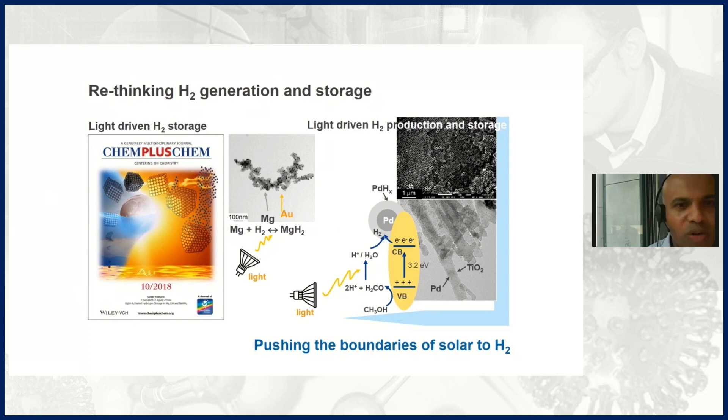The implication is this: today everybody talks about having a renewable farm, an electrolyzer on site, and then a large-scale storage system of some form. We could replace all of that with a single material that directly splits water using sunlight, stores it in the material, and that's what you ship.

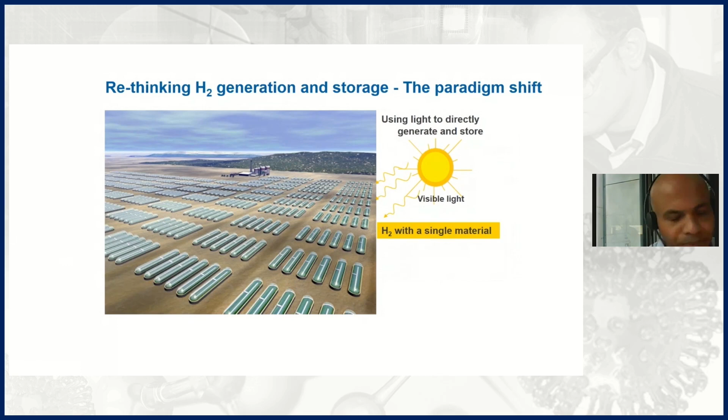On this note, I would like to thank the teams working with me who are doing all the hard work behind the science, and thank you for your attention.

Thank you, Francois. We don't have much time for questions, but one question that's come through the chat quite a lot is: when? At the moment, governments are investing in very large scale batteries to back up solar systems. There seems to be a lot of investment going into batteries right now. When are we going to see your last picture, the one where that's replaced by hydrogen? And also, perhaps, what do we need to do to make that happen?